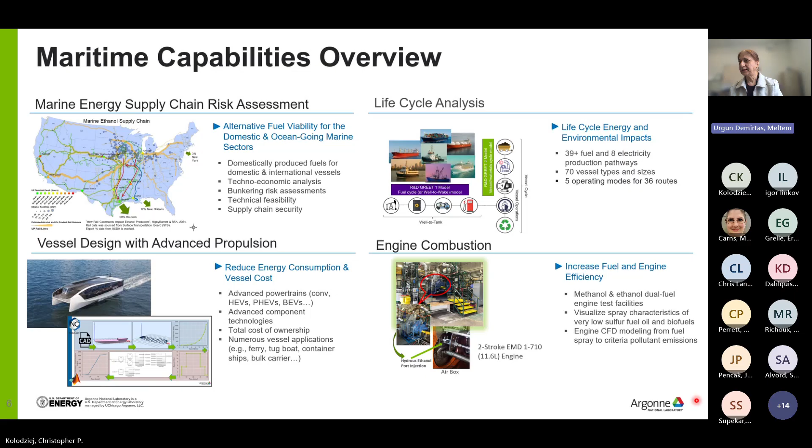Argonne also has an engine research test facility. In that facility, we have 2-stroke engines that allow us to do fuel testing. We recently tested methanol and ethanol with an aim to understand how we can blend them to provide very low sulfur fuel oil using these biofuels. We also look at the spray characteristics of these very low sulfur fuel oils as well as other biofuels that have been tested at Argonne National Laboratory.

Next slide, please. When it comes to port operations, we are looking at system level analysis, and incorporation of mode shifts across marine, road, and rail, with an aim to decrease transportation time for commodity flows as well as transportation of passengers along these three different mode shifts across the United States. We also developed a marine footprint calculator using data provided by the EPA, which we include in our GREET life cycle model to conduct port inventory data analysis at equipment level, such as off-road, rail, or harbor operations.

Our other team is focusing on shipbuilding and technology supply chains, as well as workforce development. We are looking at shipyard throughput efficiency, and availability of materials and components needed for building new ships, especially ocean-going vessels in the United States. We are also looking at supply chains starting from the steel or other inputs to the final product delivery, and we have been quantifying the capacity to scale production of assets.

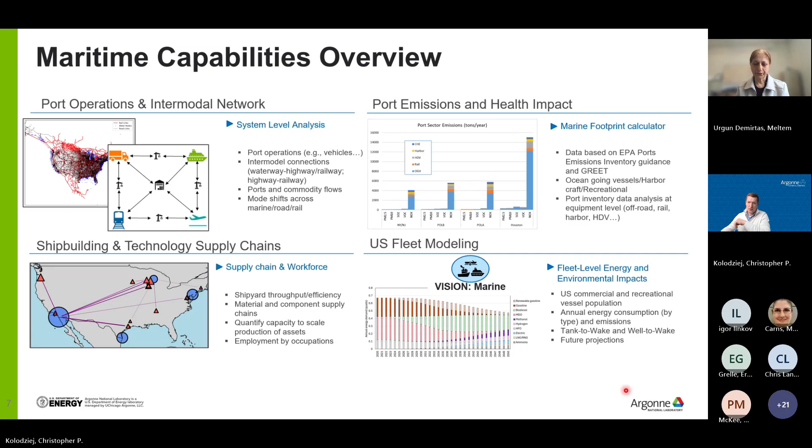So within all of this, we're going to dive deeper today into the specific U.S. shipbuilding vessel supply chain risk assessment work that we've been developing over the last year or so.

Also, importantly, we continue to consider the vessel operations and continuity of operations with regards to different fuel or energy types and different vessel technologies or vessel type options in terms of maintenance or unplanned downtime, safety events, really driven from historically available data.

Especially on the shipbuilding side, we are employing a means of probabilistic risk assessment that we've developed at Argonne coming out of the nuclear and offshore gas and oil side of the lab, to apply for supply chains, especially the shipbuilding and shipyard supply chain, incorporating a Bayesian network risk assessment.

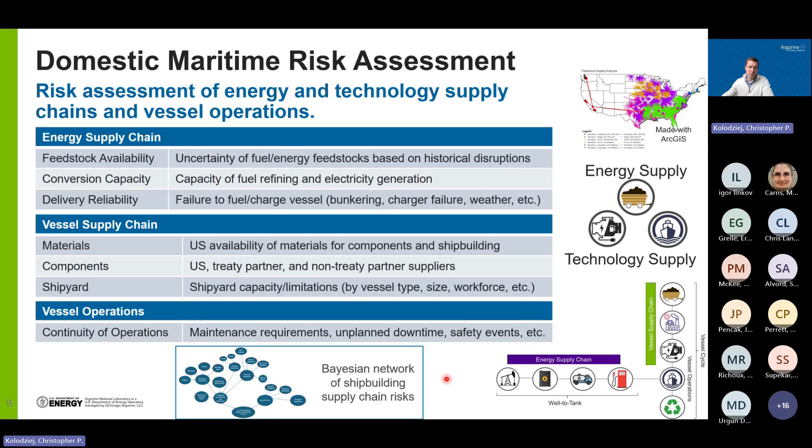As much with any kind of risk assessment, it's performed in 4 stages: first being risk identification, risk analysis, risk evaluation, and then sensitivity analysis.

To date, we are between the risk identification and risk analysis steps of the PRA for shipbuilding supply chains and shipbuilding. So that's what we're going to dive into and show you today.

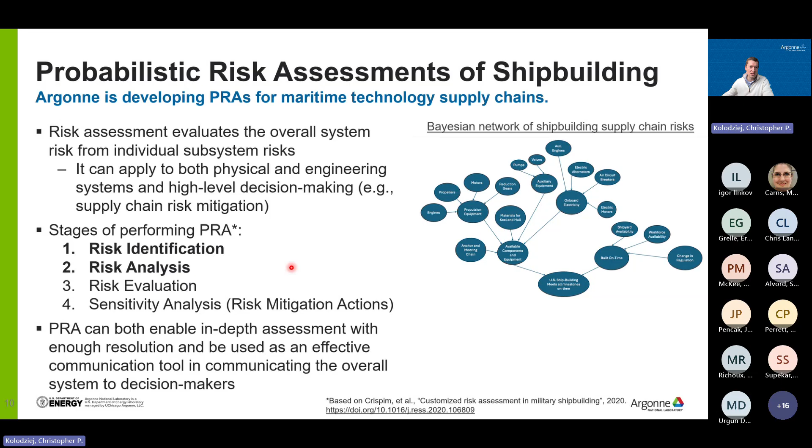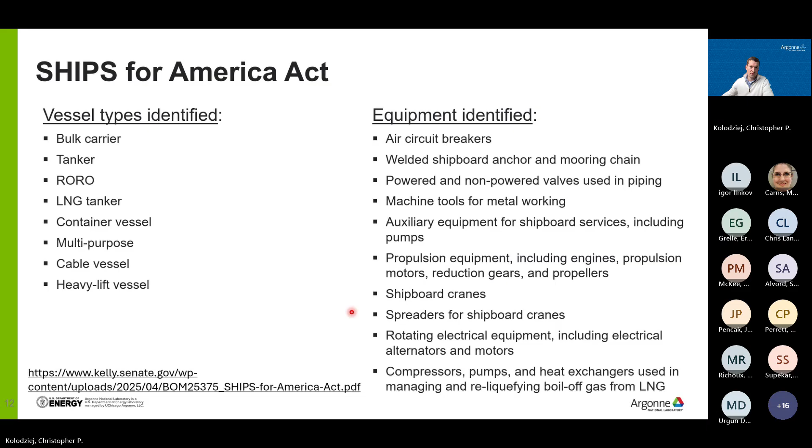The source of our data up to this point has been a combination of the IMO's vessels registry, where we've looked at U.S. flag vessels greater than 10,000 gross tonnage delivered from 2013 to 2025. For those 76 ships that qualify under those filters, we are pulling information from class societies such as ABS, DNV, Bureau Veritas, or Lloyd's Register to look at shipbuilding timelines, anywhere from steel cutting, keel laying, ship launch, and ship delivery.

Within that, there's information for a given vessel on where key components are coming from in terms of their propulsion, power, cargo, mooring, steam, and other systems. That's information we've been tracking and trying to map with regards to at least these initial 76 U.S. flag ships that we've identified.

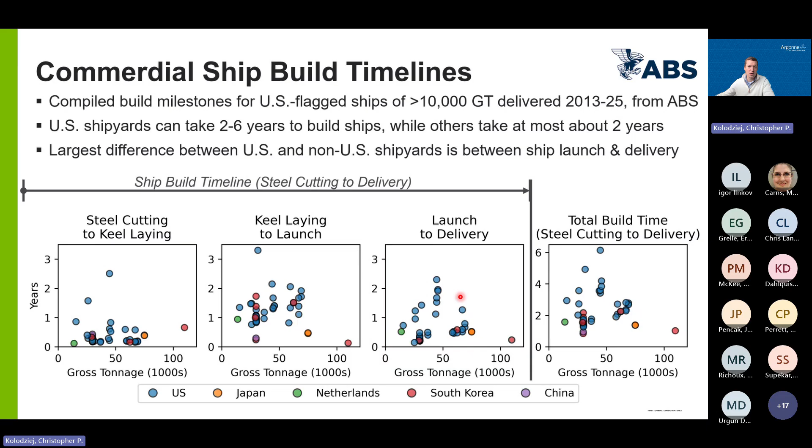And when we look at the different milestones, such as steel cutting to keel laying to launch to delivery, where we see the biggest discrepancy of U.S. shipyards compared to non-U.S. shipyards in this subset of vessels is particularly in the fitting out stage from launch to delivery. So we think it'd be worthwhile to dive deeper into this milestone period to see what's causing some of these delays and where U.S. shipyard efficiency can be improved.

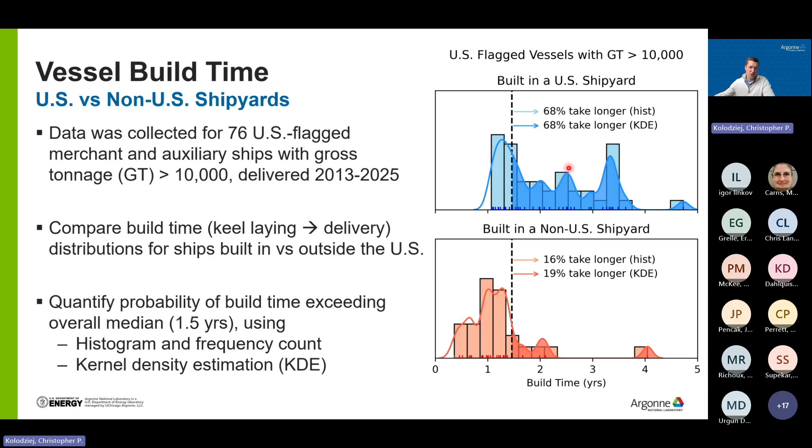So taking these 76 U.S. flagged vessels, again, over 10,000 gross tons delivered in this time frame, we can look at how the distribution of their delivery times, their total shipbuilding times, compares with the median across global shipyards. We're looking at built in the U.S., about 68% take longer, whereas built in a non-U.S. shipyard would take roughly 16 to 19%, depending on the statistics you're using, longer than the median. This identifies that there's a significant need for improvement in U.S. vessel shipyard construction times, and that's a key area for us to think about.

From the data, again, we only have a select set of vessels that we're evaluating, but one of the next steps in our approach is to start to drill down deeper into vessels of a certain type, as well as subsizes within certain vessel types.

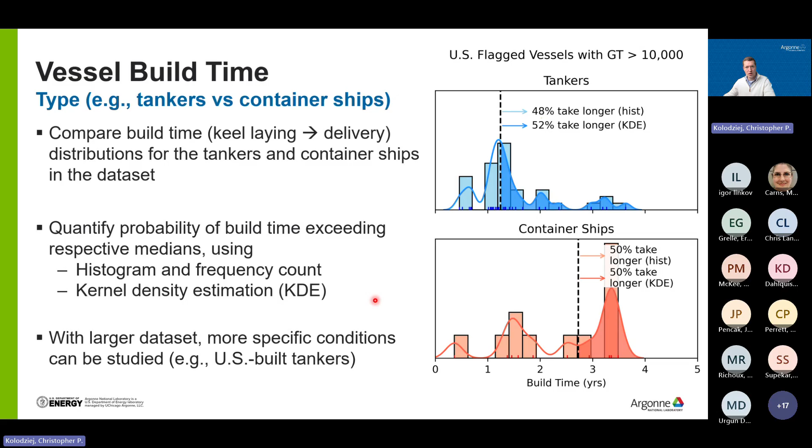So now, switching gears from shipyards to the material supply chain for those shipyards, I'm going to hand it over to Sarang Supekar from Argonne to walk us through a couple slides.

Thanks, Chris. Just a quick heads up that we tried to keep these couple of slides at a very high level to talk more about the capabilities rather than the specific application to a particular ship class or what have you. I'll just mention that some of these capabilities are currently being used on the defense side of things, so they're up and running. I just want to give a high level overview of where they are. So the first thing that I want to introduce you to, maybe Chris, we can go to the second slide first, as a way of starting the story there.

So in the context of shipbuilding, if you think about steel, you saw steel on some of Chris's slides. It's important to first understand how steel is consumed at a detailed level in our economy, for a few different reasons. One, if we are looking to increase or expand the consumption of a particular grade of steel for shipbuilding, it's important to understand what other competing applications there might be in the economy that might get affected as a result. So this serves as a really good baselining effort.

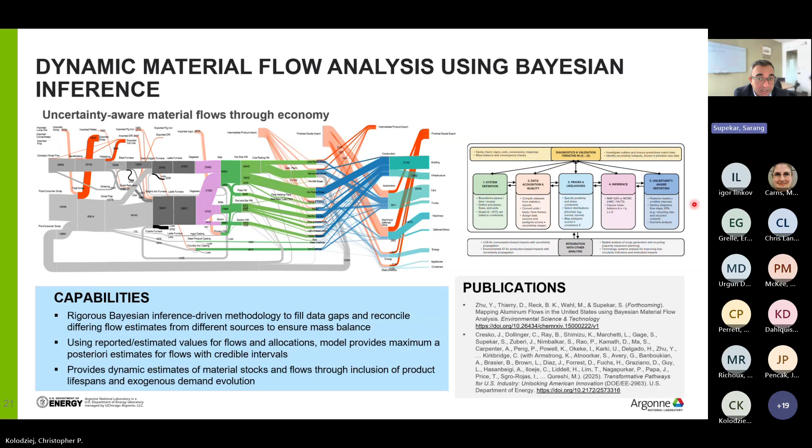So once we have an idea of how a particular material flows through the economy, the next question in the context of the discussion that Chris and Meltem laid out is, what does an expansion to that infrastructure for producing raw materials and intermediate products look like? Chris, if we go to the previous slide now.

At its core, it's a model that tells you which technologies to deploy, in what capacity to either expand or contract operations, where new facilities could be set up, and how and when to add this new capacity or expanded capacity. So the phasing and path dependency is

endogenously addressed in this model. The model is built to allow exhaustive sensitivity and scenario analysis, and we can look at economic, environmental, and operational constraints and objectives as well.

We can also do multi-objective optimization and facilitate decision-making under uncertainties and sometimes under competing goals, where you are looking to balance cost with time to ramp up, for example, considering constraints around availability of energy resources, material, other infrastructure inputs, and labor inputs.

So the model was built to be very flexible. We can model something like steel just as well as we can model tortilla manufacturing, right? Not that tortilla manufacturing is terribly relevant for naval applications, but just to illustrate how flexible the framework is.

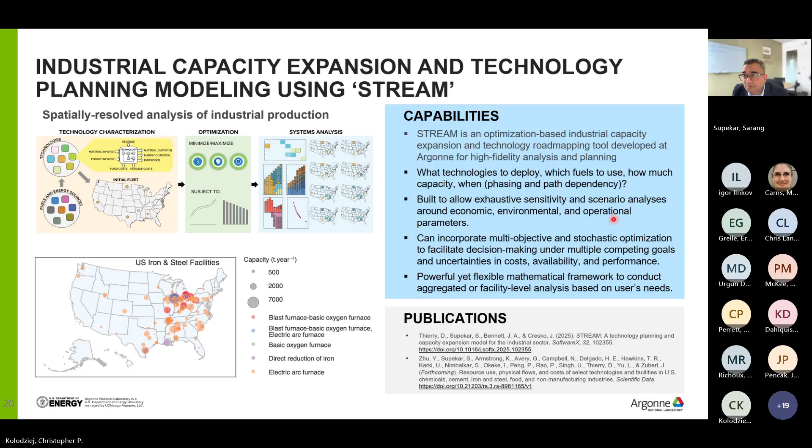Great, thank you, Sarang. So now let's switch gears from the material supply chain, understanding steel and other materials needed for shipbuilding, to the components.

12 of these 22 US-flagged ships were built in the US. 438 total components were documented in terms of their manufacturer location and what models and everything that they were.

And the triangles, let me back up and say that the size of the circle is also relative to the size of the throughput or capacity of those shipyards.

The orange triangles are locations of component manufacturers that are part of those 438 components on these 22 U.S. flag ships. As we continue to expand to include more ships and components, we'll have more detailed mapping, but this gives you an idea of the framework and flow of different components, both within the US, such as engines, motors, generators, gears, and cranes, as well as components sourced from outside the US, including engines, motors, generators, propellers, anchors, anchor chains, cranes, elevators, boilers, coming from Asia or Europe.

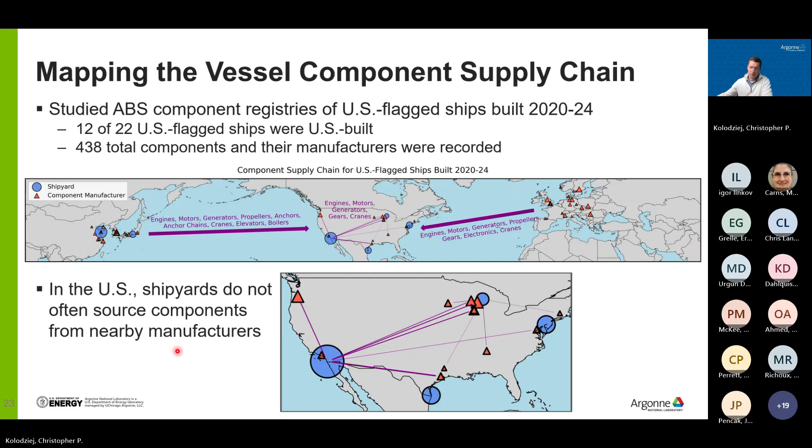I'll point out here, and some of you on the call will be quick to point this out, that within the US we have the Great Lakes bulk carrier fleet, which operates on fresh water and naturally has longer lifetimes because they're not exposed to salt water. Within this distribution of approximately 150 bulk carriers, US flagged, a quarter of those are operating on the Great Lakes. Pull those out and you still have a significant distribution of bulk carriers that are well beyond the median lifetime relative to the global fleet.

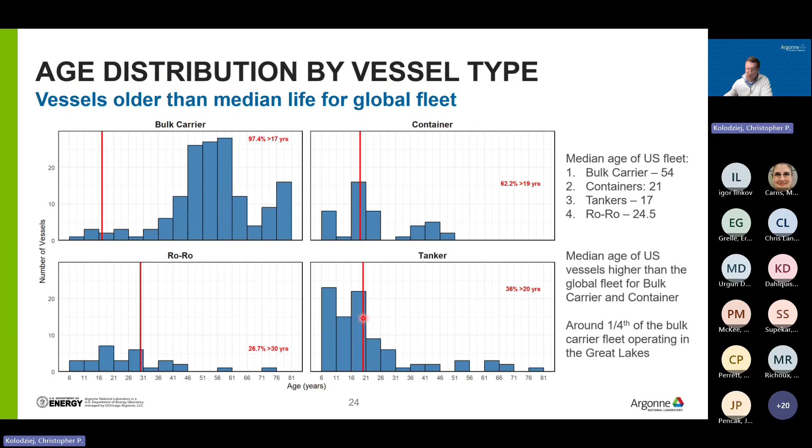The same can also be said for bulk carriers as well as container ships. We see there's several container ships that are also older than the median, whereas the story is not as bad for ro-ros and tanker ships. Again, this is a subset, so as we continue, we're going to be adding to this and getting better statistics.

So now looking into, for safety and efficiency purposes, vessels lose 80% value by the age of 25. Fuel consumption increases by 30 to 40%, while maintenance increases by 80% as vessels get older than 25 years old. Based on a recent DNV report, most machinery failures, about 45% in 2024, occurred for vessels with an age higher than 25 years.

And that's why you see this analysis of how many of the vessels are older than 25 years old. You can see in the US flagged fleet, we have quite a few vessels older than that mark. What we did here is look at data from this recent DNV report, which catalogs all of the different incidents, whether it's mechanical or fire or collisions, allisions, other sorts of incidents on vessels. What they show is that there's a direct correlation between vessel age and an increase of incidents, especially in terms of mechanical failure, which can make sense.

And so as the U.S. fleet ages, we don't only need to think about shipbuilding for new vessel types and key vessel types that we currently don't have, but we also need to keep in mind the need to maintain and replenish the types of vessels we currently have in the fleet, keeping in mind that as they age, their costs, their incidents, their mechanical failures are also going to increase.

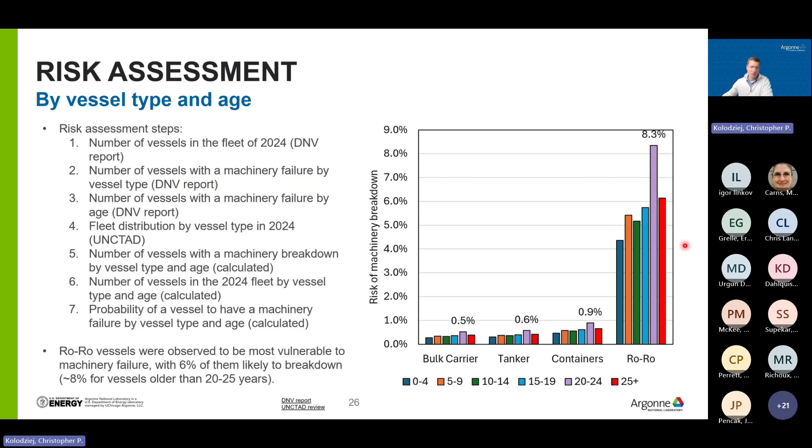So what we did here as a first step in building our risk assessment is look at the risk of machinery breakdown by vessel type—bulk carrier, tanker, container, and ro-ro ships—based on the age of the vessel. As you can see, as the vessel gets older, moving from left to right, there is a higher risk of machinery breakdown, with a particularly higher risk of incidents with ro-ro ships, based on this global data from DNV and UNCTAD.

Then looking back internally at U.S. shipbuilding capacity by vessel type, you can see the number of ships that were produced from 2010 to 2023 in the U.S. We have a certain number of tanker ships, container, bulk carriers, and ro-ros.

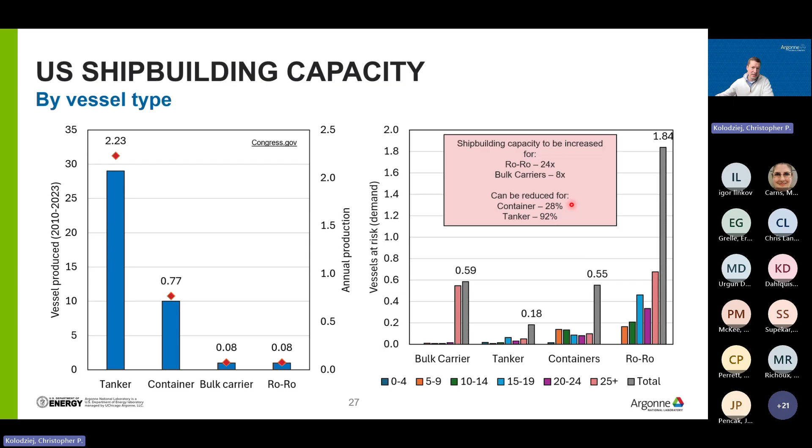And so the vessels that we are most at risk of needing to replenish would be those in the ro-ro and bulk carrier, where we need to increase our capacity for producing ro-ros 24x, bulk carriers 8x, while for the time being, we could reduce our need for container and tanker ships in the immediate future.

So now switching from vessels to components, this is looking at those 348 components that were in 12 US built and flagged ships greater than 10,000 gross ton, based on data from the ABS registry. Blue shows the domestic source of that component. Orange is from a treaty partner, so one of our allies either in Europe, South Korea, or Japan. And gray would be from a non-treaty country where that component was sourced from.

This helps us to understand, of these 12 US flagged and built ships, what was the percentage of engines that were coming from the US, roughly 60%. So that's an area where we're doing somewhat well. And how much of the remaining engines were coming from our allies and from our non-treaty allies. So you see that from an engine standpoint, 100% of those engines are coming from either ourselves or our allies.

And we can kind of go down the list by different vessel components and identify what's the risk in future shipbuilding, that we're able to sustain our shipbuilding activities domestically with domestically sourced components. Some things will catch your eye where there's no blue at all, such as anchors and motors and hardware, and ultimately where there's neither blue nor orange, such as boilers.

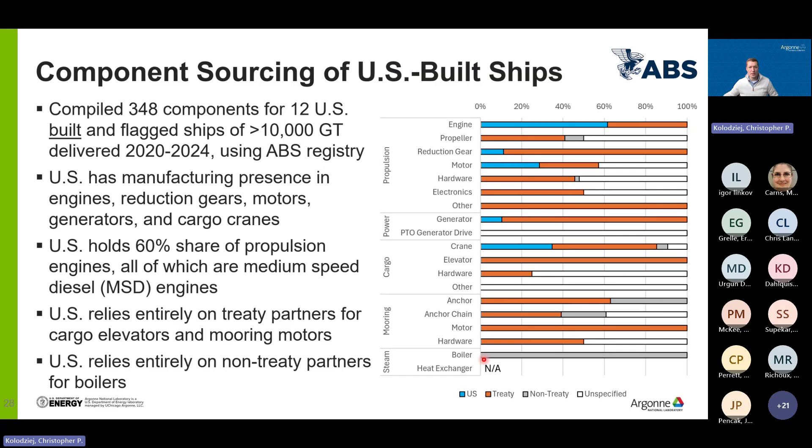So this is information that's going to feed into our shipbuilding risk assessment. And if we look closer, we can identify within marine engines certain size classes that the U.S. is especially strong at, such as medium speed diesel engines.

I'll just skip to this one here. Greater than 2,000 horsepower, we're especially strong at, whereas you won't see much at all of U.S. built from slow-speed two-stroke diesel engines, whether less than or greater than 20,000 horsepower. We're sourcing those from outside of the U.S.

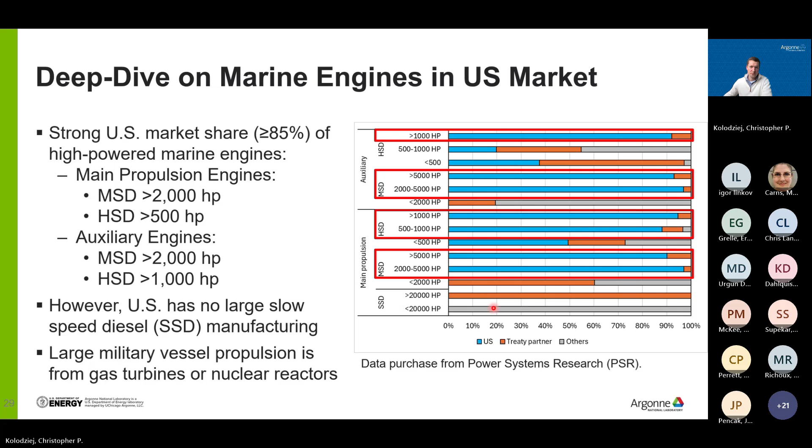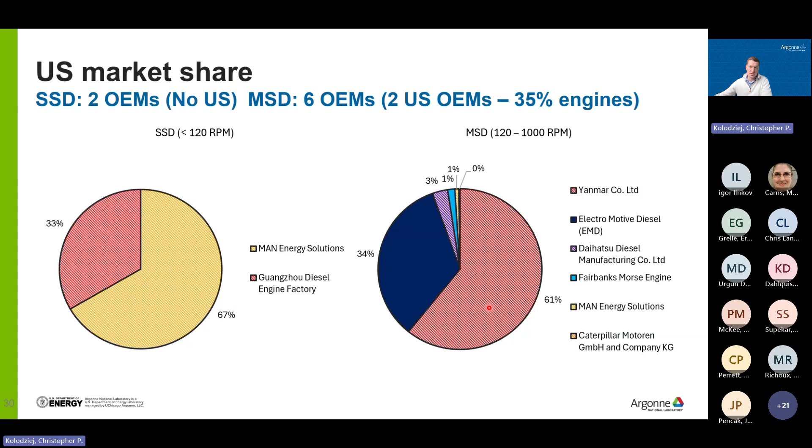Here, I won't go into details to save time, but we've been evaluating specific engine manufacturers and manufacturing locations. On the medium speed diesel side, in this RPM range, you can see Electro Motive Diesel is especially a strong manufacturer, which is a U.S. manufacturer. So with that, I'm going to hand it over to Erna Grelle, who's going to talk a little bit about the work we've been looking at into the hot topic of maritime and nuclear analysis.

Thanks, Chris, and hi, everybody. So nuclear is a little bit of a left field subject here, I think, in this overall presentation. But as Chris said, this is something that's been discussed very actively in the last couple of years. So we thought we would show off our proud history that's rooted in the research relevant to nuclear power.

self-sustaining nuclear chain reaction, fission reaction, was Dr. Enrico Fermi, and Dr. Walter Zinn is on the right, unveiling the commemorative plaque at the site where the first nuclear reaction occurred at the University of Chicago.

And then on the right, we see the picture of the USS Nautilus, which is the original SMR. So the original small modular reactor, which is a hot topic, was in fact marine, and it was run. The propulsion was enabled by the S2W reactor, which was manufactured and installed by the Westinghouse Electric Company, but it was based on its land prototype, the S1W reactor that was designed, built, and tested by Argonne National Laboratory. So that's a very important bit of history here.

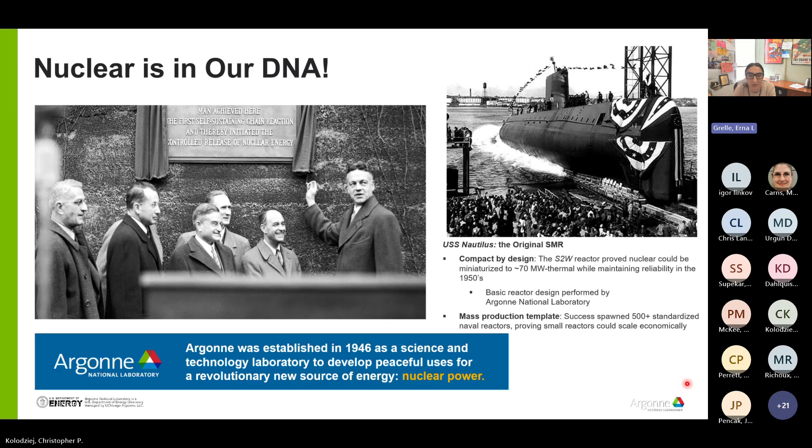And later on, of course, the S2W reactor became a mass production template of success, which had a little bit different results in the military applications and the Navy applications than civilian applications. But this is essentially the research we're doing now, is trying to close the gap between the military success and trying to bring it over to other commercial nuclear systems. So next slide, please.

When it comes specifically to nuclear supply chain component risk assessment, I'm going to talk about a framework that's been applied to land-based reactors but can also be transferred to maritime. Nuclear systems are really a system of systems—thousands, maybe tens of thousands of discrete subsystems that present procurement items, each carrying its own risk. In nuclear especially, we focus on the risk of cost overrun, and how overall cost overrun can be a function of cost volatility of individual components and subsystems. The same framework can be applied to supply chain and availability.

When the system is broken down, leveraging a framework developed in collaboration with and based on the Electric Power Research Institute, EPRI, it's a code of accounts—a very elaborate spreadsheet. I don't have a screenshot here because that wouldn't make sense, but it systematically decomposes nuclear power plant designs into constituent subsystems to assess component-level cost uncertainty and supply chain risk. We feel this is a proven analytical tool—we've used it early in procurement of early test reactors, and this can be very applicable in the maritime shipping industry.

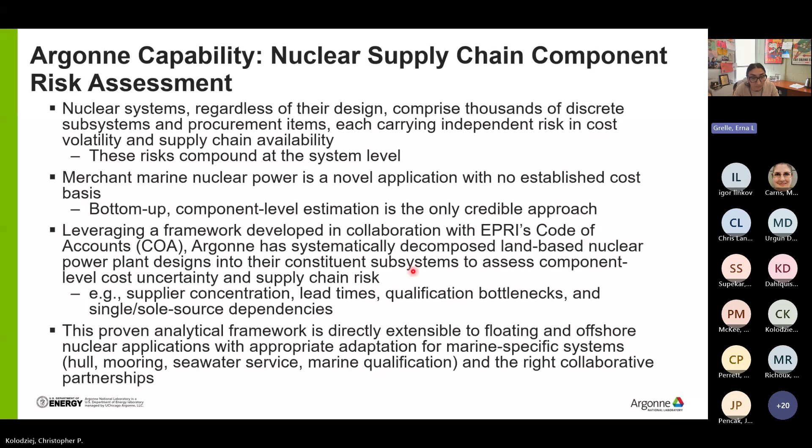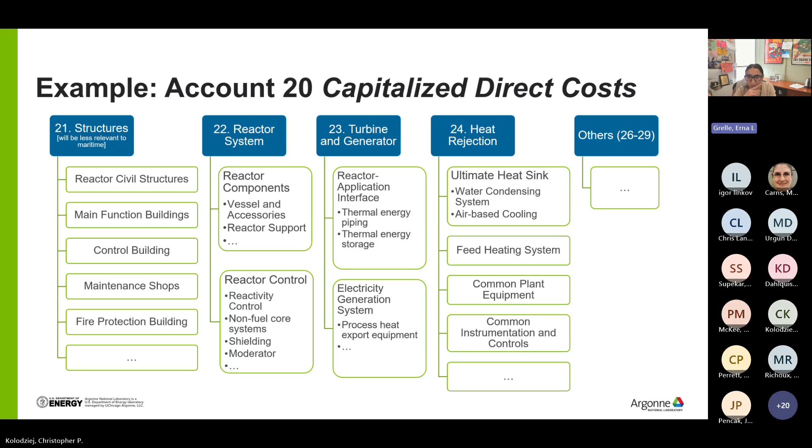That's all I've got, really. I just wanted to show you a glimpse of this widely used framework that we've applied. Back to you, Chris.

Thank you, Erna, for giving us a taste of the maritime nuclear nexus here. Another topic I want to introduce is a recent Argonne-University of Michigan MOU signed in the last couple of months, and maritime is one of our first areas of mutual collaboration. I'm going to invite Professor Matt Collette to talk about work at Michigan and how it's fitting in with the work at Argonne.

Thank you, Chris. Let me make sure this is working. Thank you, Chris. Can you hear me? Yes. Yep, okay.

The University of Michigan is really excited to partner with Argonne National Lab. Michigan has a 145-year legacy of leadership in naval architecture and marine engineering. We were actually founded at a very similar time to the current time, in 1879, when the United States had realized it had lost maritime competitiveness.

After the Civil War, the U.S. had focused more on inward expansion, and we had fallen behind Europe in iron shipbuilding and steam propulsion at that time. So we were founded under a congressional grant to start building up those skills domestically.

Since that time, we have been working on trying to promote the U.S. maritime industry. Unfortunately, we are currently the last remaining R1, or research intensive, university that offers a bachelor's through PhD degree in naval architecture. We have some phenomenal collaborators in teaching - all the service academies and Webb Institute focus on teaching, and we have some small graduate programs scattered throughout the country.

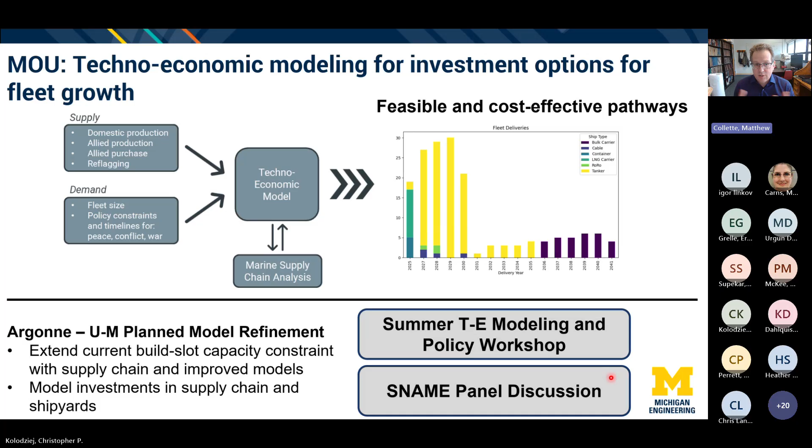Next slide, please, Chris.

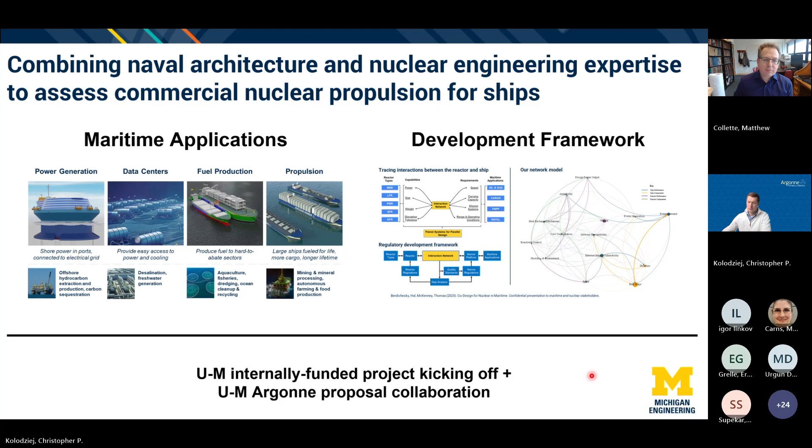Thank you, Matt. I'll pull up the tail end here for a quick summary. Essentially, Argonne and the University of Michigan have significant expertise and experience, as you've seen, in maritime energy and vessel research and analysis to assist the U.S. government and private sector develop a commercial shipbuilding strategy.

We're gathering background data to identify key supply chain risks of materials, components, and shipyards, and putting all this data and knowledge together to build and employ quantitative models that can evaluate different shipbuilding scenarios and help the U.S. government come up with an overall shipbuilding strategy.

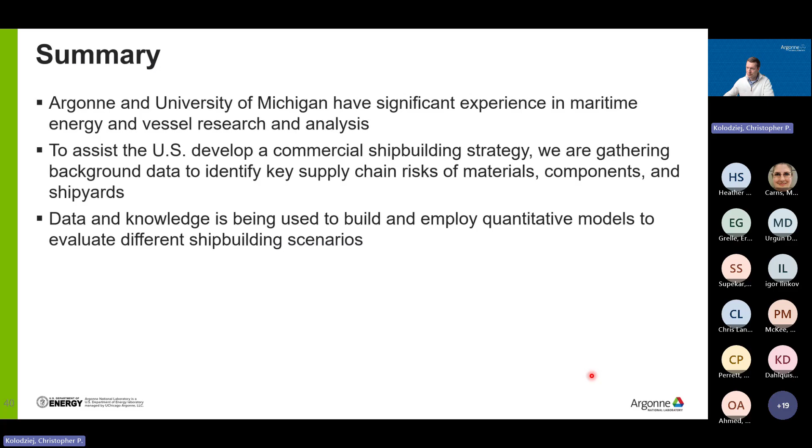With that, we'd very much like to thank Michelle and CMTS for this opportunity to talk about this work, which to this point has been mostly internally funded. So if anyone on the call has ideas of RFPs that are out or coming out, please let us know, as we'd like to continue expanding this work and solidify our partnership with the University of Michigan.

So with that, Michelle, back to you if there's time for any questions or comments.